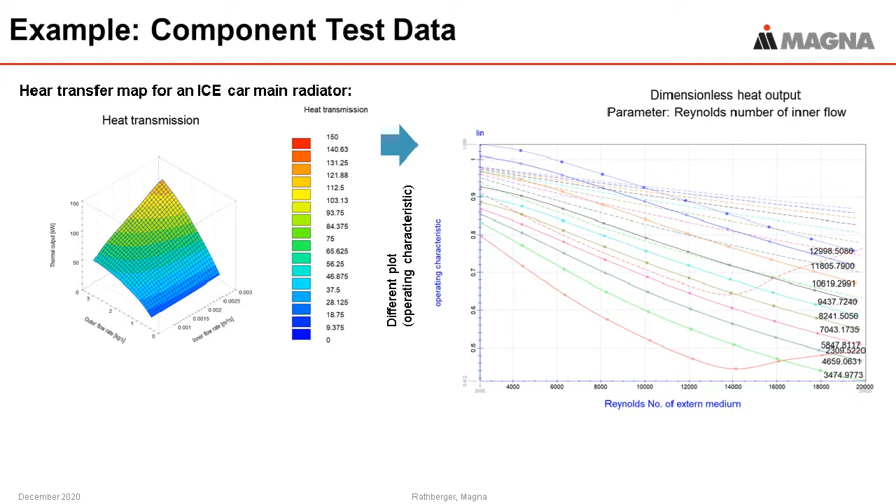But if you take a closer look at this map, and if you translate this test bench data into dimensionless numbers, so if you look at the Reynolds number and the Nusselt number, then what you see, and these are examples from our simulation tool KULI, is that some of the operating points do not look quite right. So these bold lines here, these are the measured curves.

And what you see is that when the external heat transfer exceeds a certain value, then these numbers start to rise again. These curves have a curvature here. For example, if you look at the red line, it climbs here. This might look a little bit strange. Actually, this is not a problem. It just shows that for sufficiently high air flows, the total heat transfer is dominated by the heat transfer on the air side. So this is actually quite okay.

But what is not okay is if we compare this to these dotted lines here on the top. These dotted lines are the theoretical maximum heat transfer that you can achieve, the theoretical maximum Nusselt number. And what you see is that there are some points which are unphysical. This means that they are not to be expected from the heat exchanger data that we have entered. They do not make sense, and they violate the laws of physics. So it's not that they are unlikely, it is frankly that they are impossible.

So what does this mean? Is this a problem? It surely is, because if you look at these lines here, these are the points where you have high coolant flow rates and very low airflow rates. And these are typically the points that are most critical for a vehicle. This would be, for example, an uphill trailer condition where the airflow is very low because there is hardly any ram air pressure from the air coming from the front of the vehicle.

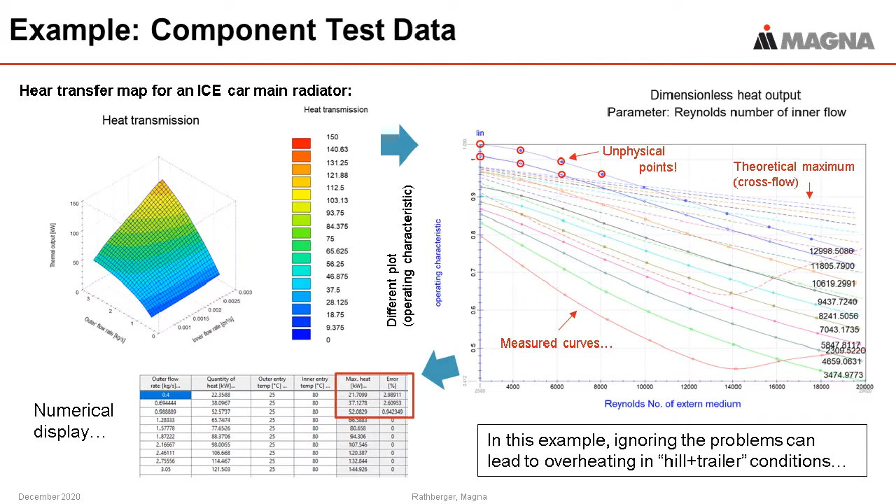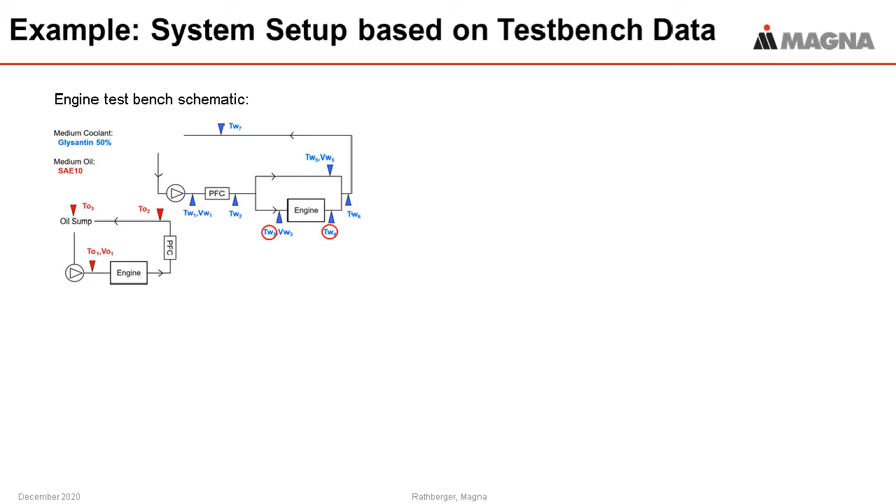And what we see is that the first couple of points, they look pretty realistic. There will be some heat rejection from the engine to the coolant. Accordingly, it will warm up. But then at operating point 7 or so, something strange happens. Suddenly, the temperature information drops to a little bit above 20 degrees Celsius. And even without any detailed analysis, something is very, very strange here.

This is of course a generic example, but we have seen very similar things in real life test scenarios. Probably a sensor has fallen out. I mean, it has probably just broken down, or probably it has been shaken loose from the vibration of the running engine on the test bench. Whatever. For one reason or the other, this sensor value drops to a little bit above ambient temperature.

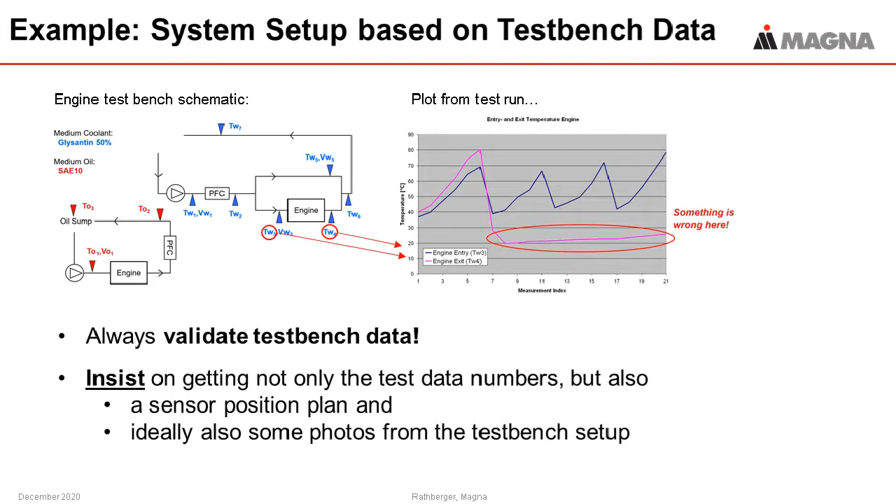So what kind of implications does this create? Well, obviously, if we enter this data in our simulation model straightforward, we will get garbage. Even if the first couple of points are correct, these baseline points for the higher operating conditions are just not usable. On the other hand, if we check this and see that these values are wrong, then we can probably use some of the other measurement positions and identify a realistic heat rejection for the engine by doing some math there.

We could, for example, compare the total input and output between the point right after the PFC, the heat exchanger, and after the engine branch. We can do some math. We can work with data anyway. But in order to do so, we need the test bench schematics, and we need to look at the results.

So to summarize this first point, what do we have to take care of? Well, the most important thing is never blindly trust your test data. And even if it's probably technically not your responsibility, you will be in a lot of trouble if some problems occur. Always validate. And as we have seen in the last example, it does not always have to be some complicated math. You don't need physics all the time. Sometimes a simple visual check, if this looks like you expect it to look, is sufficient to prevent a lot of additional effort and trouble.

Always use the support that is offered by a simulation tool. Many tools, including, of course, our simulation tool, KULI, will give you warnings if something unexpected occurs. Don't disregard them. Always try, and this is something that you will not always get, to get accuracy information for the data. Because false data is not always that obvious. Sometimes you really have to ensure that you understand, for example, the precision of the sensors used during the test. And accordingly, you should really try to get this information from your test bench engineers.

Try to get background information on the test bench setup for non-standard test scenarios. Yeah, you will need schematics. If you do not know where the measurement positions were, then you are severely restricted in evaluating their plausibility. And ideally, you could even try to get some pictures of the test bench setup.

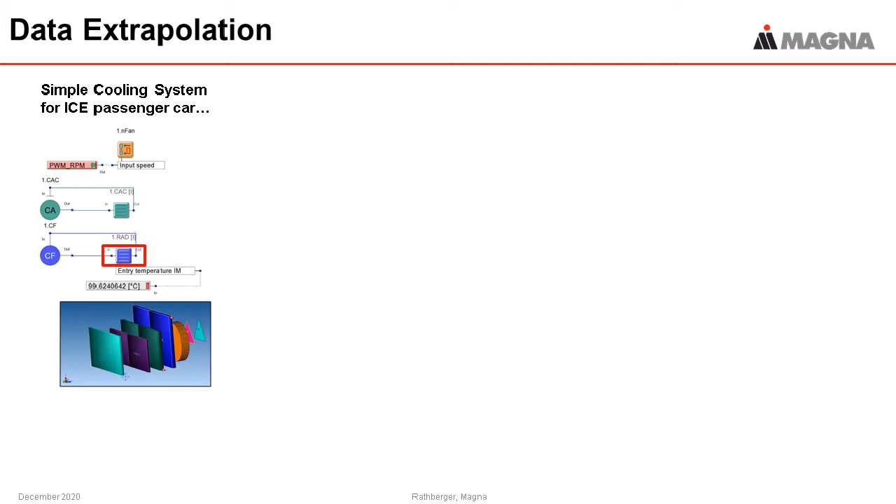So anyway, you shall not go too far. Well, what can that mean? Let me just give you an example again. If we look at this example here, we see a fairly simple cooling system for a combustion engine passenger car in this case. And specifically, we are looking at the heat exchanger setup, and specifically at the main radiator and the vehicle front end again. So what we see here in red is the data that we have received from the testbed. And we have based our heat exchanger on this data.

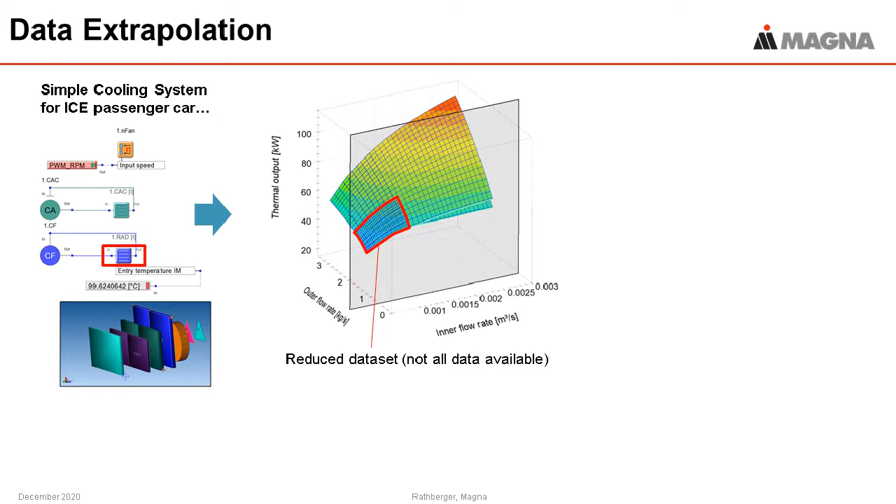If there are no physical properties available, it will just try to extrapolate based on the gradient, or maybe some other assumptions, but it will be an extrapolation. And in reality, having the identical set of data in this red area, having only data from there, does not allow us to predict which heat exchanger is the actual one.

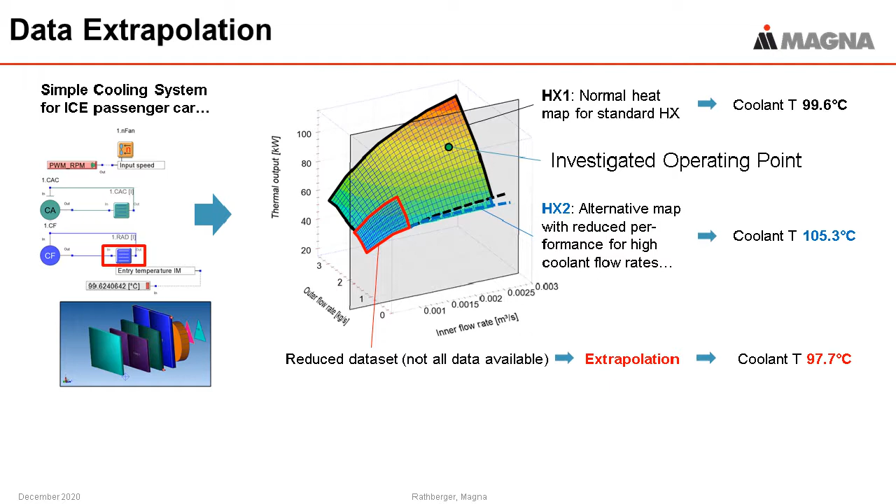But if we look at the blue heat exchanger, which has a significantly lower thermal output, this means that we need a higher coolant temperature level to remove the heat from our cooling system. And we will get coolant temperatures of 105 degrees Celsius plus. So probably this will be a problem.

And if we don't know which one is right, our tool will probably tell us you have around 98 degrees Celsius. And if instead we have over 105 degrees Celsius, this is not a rounding error anymore, but this is something that can lead to severe overheating problems in your final vehicle, so it should be avoided.

And how can it be avoided? Well, first of all, you have to be aware that there might be a problem. You have to know that there is extrapolation occurring. And in our post-processing tool in KULI, we will give you an extrapolation warning. Other tools will most likely do very much the same. But people tend to disregard this because they say, oh, well, the temperature results look good.

Let's just move forward. And it is tempting, obviously, because you never want to replace a simulation result that's good with something that's problematic. But sooner or later, the reality will leap up on you, because physics just cannot be cheated.

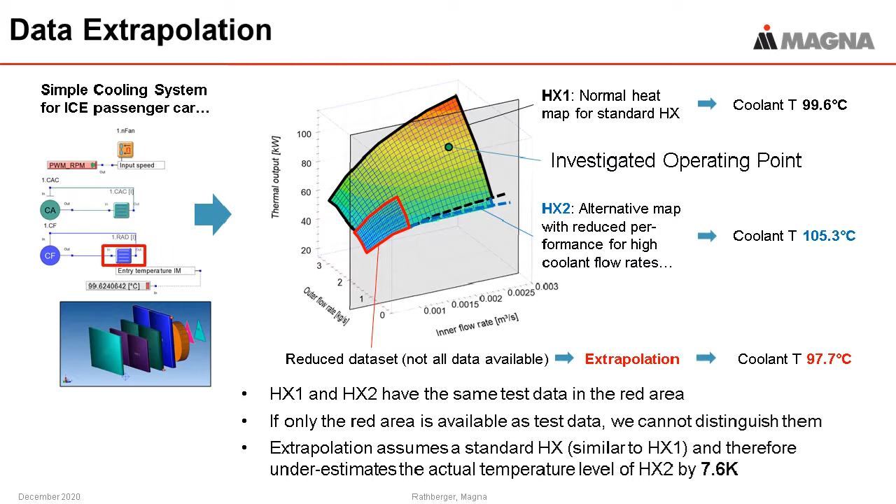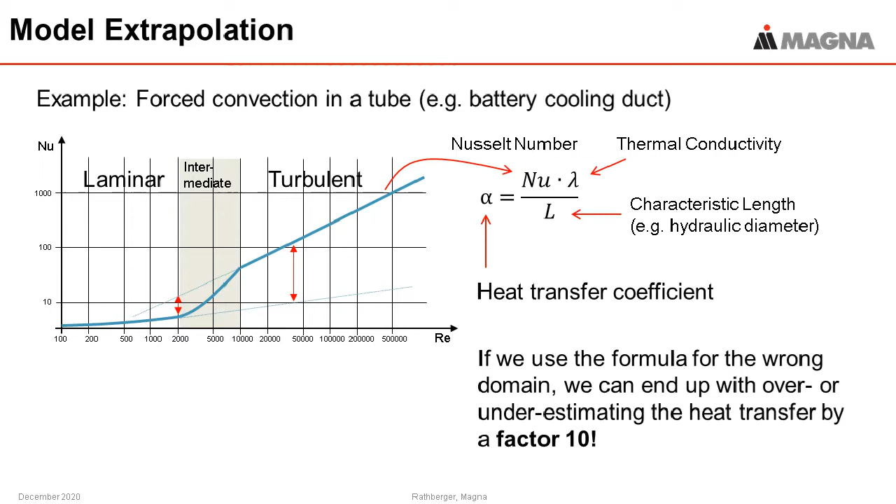So how to summarize? Always check if extrapolation occurs. It's that simple. Of course, your simulation tool will help you with this. KULI definitely does. Others do as well, I would expect. And avoid extrapolation if possible.

Of course, I'm not saying that extrapolation is a problem per se and always. There can be situations where you just do not have more information than what you have at hand. And in this case, you need to extrapolate. Maybe if extrapolation is just by a few % outside your tested area, it will be okay. It will be reasonable. Sometimes you will even have to go further out and just do an intelligent guess.

But then at least you have to be aware that with the assumptions that you make, also your simulation results will be nothing more but an intelligent guess. They are probably better than nothing, but they are certainly not the truth. So if you must extrapolate, be careful and always check the plausibility.

Deadly sin number 3, unnecessary complexity. I think the picture on the left-hand side once again shows it all. So once you get used to working with your simulation tool, once you become an expert, once you know how your tool works and you understand all the details, it will be very, very tempting to set up very elaborate models and just enjoy the level of detail that you have implemented and the pure beauty of it from an engineering point of view. But you shall also find beauty in simplicity, especially when complexity does not bring you benefit, as shows the next example.

So this is a cooling system for a battery electric vehicle. So nothing very much fancy here. We have basically two branches of our cooling system. One branch which is for battery cooling, which is mostly cooled by a chiller because the battery usually wants to have relatively cool coolant temperatures, maybe around 30 degrees Celsius, 25 degrees Celsius maybe.

On the other hand, we have a second loop on the top side, which is for the powertrain cooling. Motors and electronics, they can live with higher temperature levels. They probably also will not be cooled by the AC system, but by a radiator instead. We have two coolant loops with two different temperature levels, so we want to run them probably separately. But in winter conditions, it can also be useful to use some warm coolant from the powertrain to heat up your battery. This is something that is modeled in several vehicles nowadays. I think one of the first who did this was the Tesla S.

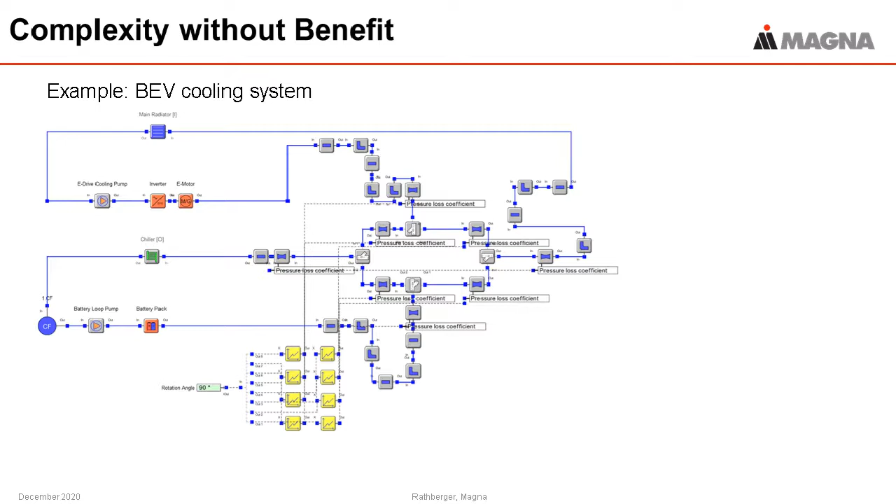And this beauty here on the right-hand side, this is what I just slightly ironically called my favorite rotary valve. So I'm obviously in love with this component because I've modeled it with a very high level of detail. I've modeled all the different diameters of the inlets, the bends the coolant makes in the ducts leading into the valve. The interior of the valve is modeled with a very high level of detail, and for sure this will give us a very faithful reproduction of the coolant mass flow distribution in our cooling system. And yeah, as I mentioned, this is the rest of the system, but nobody really cares about this when you have this beautiful, beautiful rotary valve, right?

Wrong. The problem, of course, is the mass flow distribution in the ducts will not be influenced by the rotary valve alone. The question how much coolant flows through one branch and through the other one is, of course, also heavily influenced by how much pressure loss occurs in the rest of the cooling system. So, as you can see, we have not modeled any ducts here in the rest of the cooling system. We just modeled some pressure drop of the components. Probably even that is not very accurate. We have pumps inside there, but it really lacks a lot of detail outside here.

And it might be that your task in a project is to focus on the rotary valve, but still, without the level of detail in the rest of the cooling system, you will not be able to make any reasonable predictions, even if you add more levels of detail to your rotary valve simulation model. So, accordingly, this detailed valve here brings no benefit. It's just additional effort to set up. It's just an additional potential source for errors. Each of these components has some test data or some geometry data inside. Doing things wrong here, for example, extrapolation, will just add additional problems.

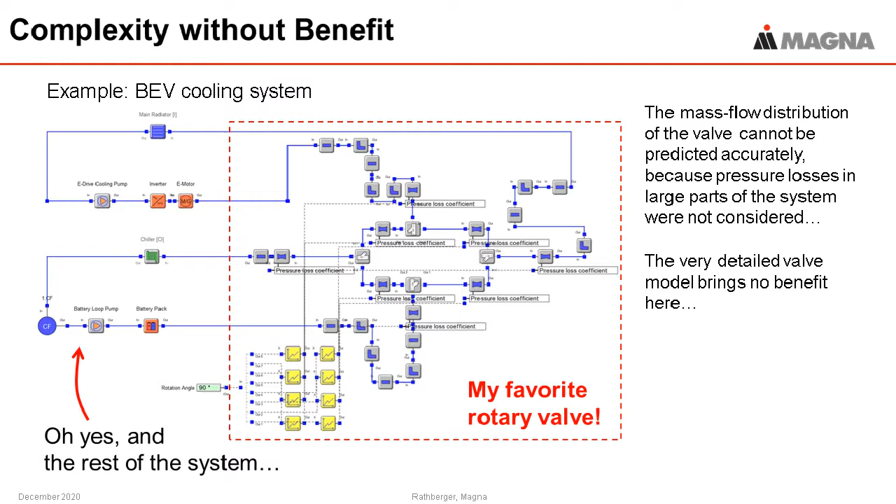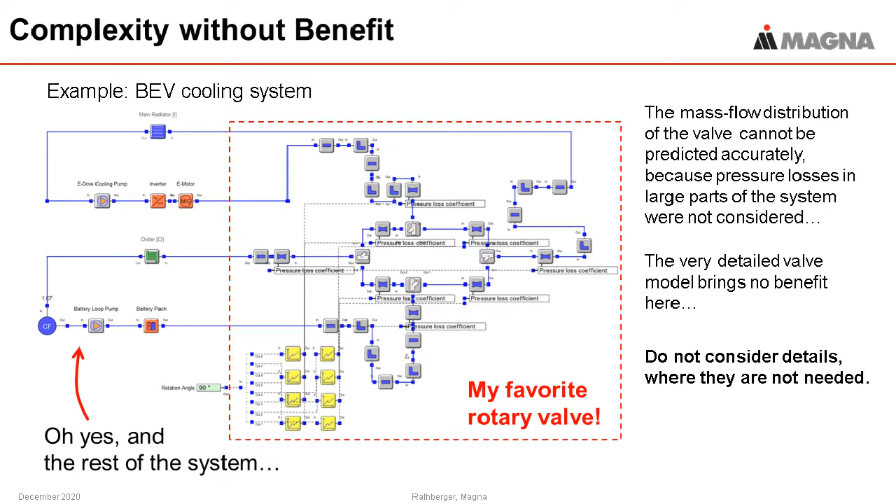I'm not saying that you shouldn't do detailed models, but you should always validate if they make sense for your specific application and if they match the level of detail of the rest of your system. And if they don't, don't do it. So, as a summary, let me say this. The accuracy of different parts of your model should always fit together. Different parts can have different levels of detail, but you have to think about how they interact and whether they have adverse effects on each other. If they don't, it's perfectly okay. If they do, you probably should think again. And then, of course, avoid unnecessary details.

Moving on to the next point, refusing help. This is something that I think even small children learn very early, that they can say, I can do it on my own, I can walk on my own, I can eat on my own, I can run my simulation model on my own. But sometimes it's not clever, because it's always better if you work together with some colleagues and let them double check your results. It's not about who is better, it's about getting the right results at the end of the day. So I didn't find much statistical data on engineering simulation.

What I did find, though, is some statistical data on software development. A study from the University of Cambridge says that software developers on average spend almost 50% of their time debugging. This means you set up a model and then you spend time looking for the mistakes that you made. In our case, when we do some simulation, this is probably not the case when we're doing just a routine task.

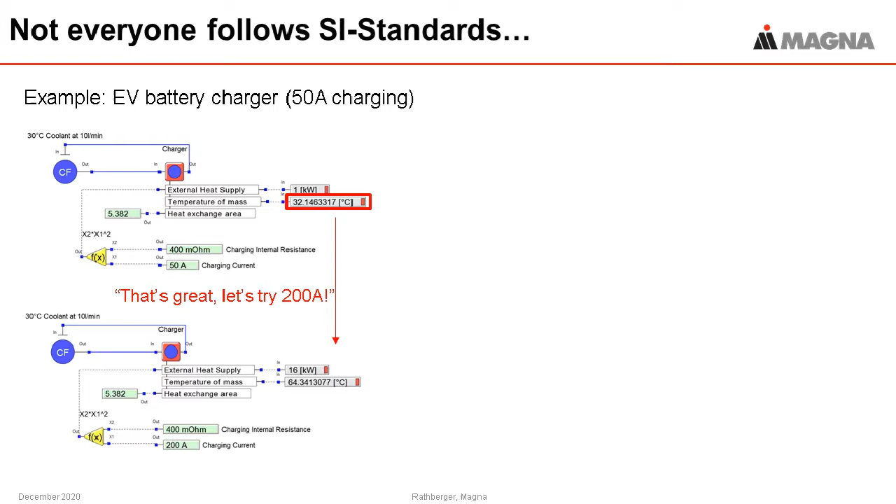If we now become more bold and increase the charging current to 200 amps, so something for fast charging, we still get 64.3 degrees Celsius, which is still quite okay. It's not a big deal here, right? Wrong. The problem is that what was entered here as 5.382 actually were square feet. And this means, as we did not specify the unit, the simulation tool was assuming that this is SI units. And it just assumed that this is an area of 5.382 square meters.

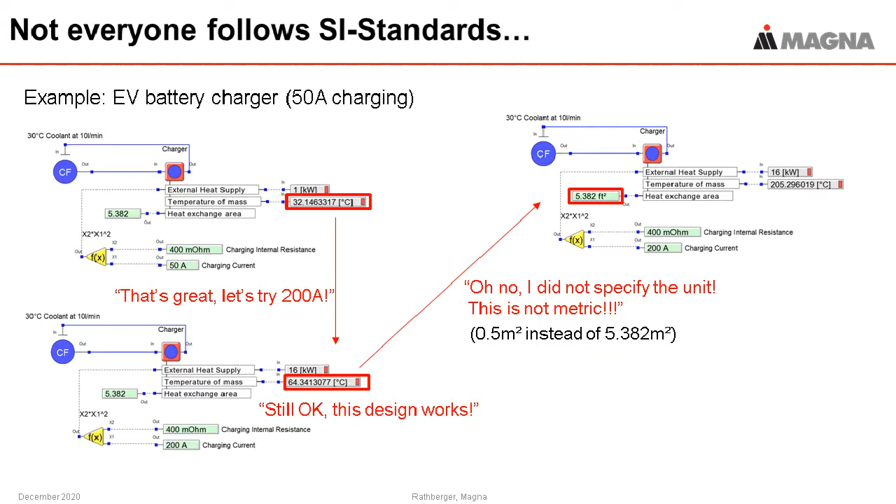So obviously we have a huge heat transfer area here. But in reality, if we add the square feet value here, then instead we end up with 0.5 square meters. And the result is that the temperature level is now at 200 degrees Celsius. And I would say that we are now approaching temperature levels where probably a Martian probe might burn up, but we definitely do not want to have these temperature levels in your cooling system. Okay.

Moving on to the summary. Always specify your units. It is important. Missing units might be misinterpreted, either by your simulation tool or by other engineers. Both are equally bad. Many simulation tools, including our software, support unit usage. It's really just a click and everything will be fine. Problems will become much more obvious when you use units, and especially if you work in teams which cooperate between US and Europe, for example. It's imperative to use the units. Everything else will lead to problems sooner or later.

And finally, the last point, wanting too much. So let's say, in a way, greed. And I've titled this: in the beginning, there was a heat exchanger. And what I mean by this is a very simple thing. Really a very simple recommendation. Do not start with the full complexity in your simulation model. Always increase the complexity step by step, and always test and validate your simulation model before you take the next step.

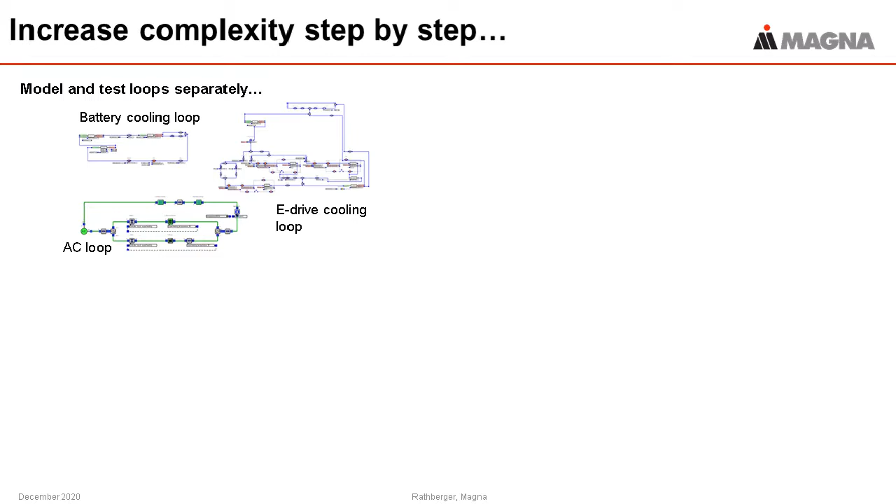I'm from Austria. In Austria, we have a lot of mountains, and when you're climbing in mountains, one of the basic things is always to secure that you have a safe step before you make the next one. And it's just the same in simulation engineering. So in this example, we have a system where we have a battery cooling loop, an e-drive cooling loop, and an air conditioning loop. And we can model each of them separately, and we can validate each of them separately. So this is what we definitely should do before we assemble them. And when we have assembled them, then the next question is, what about the controls?

Because the control system is something that is usually just as complex as the physical representation of your cooling system itself. A lot of things can go wrong there. So before you start fiddling with the controls, use some dummy controls that produce easily reproducible values and check whether your simulation model performs as it should.

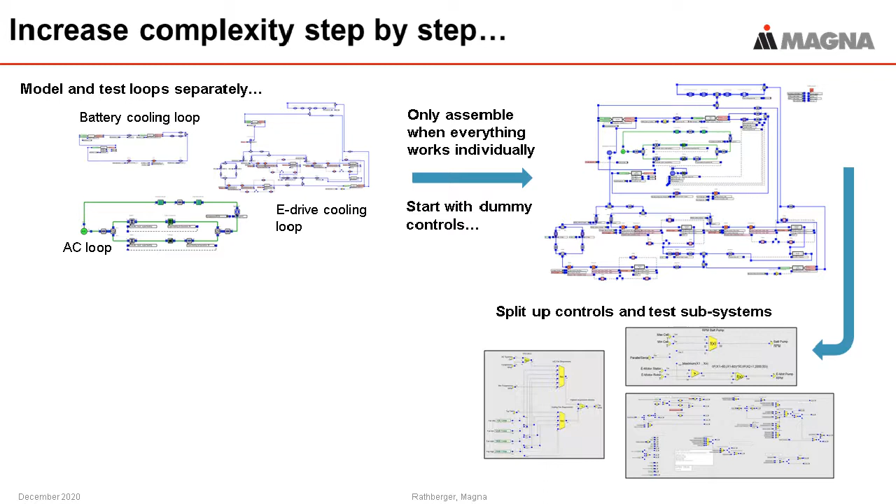And then, and only then, you should take the final step to first split up your controls and test the controls each by itself, and then assemble them to a complete vehicle model, including the complete controls. Again, this is something that seems to be very obvious, but especially in our support activities, we frequently see people committing just this sin, especially people who are not so used to simulation.

They sit at their computers, they create the mother of all simulation models in 14 days of intensive work, and then they click the simulation button, the go button for the first time, and nothing works. And as you can imagine, finding the needle in the haystack, or probably the needles, because for sure they have made more than one mistake, is just a lot of trouble.

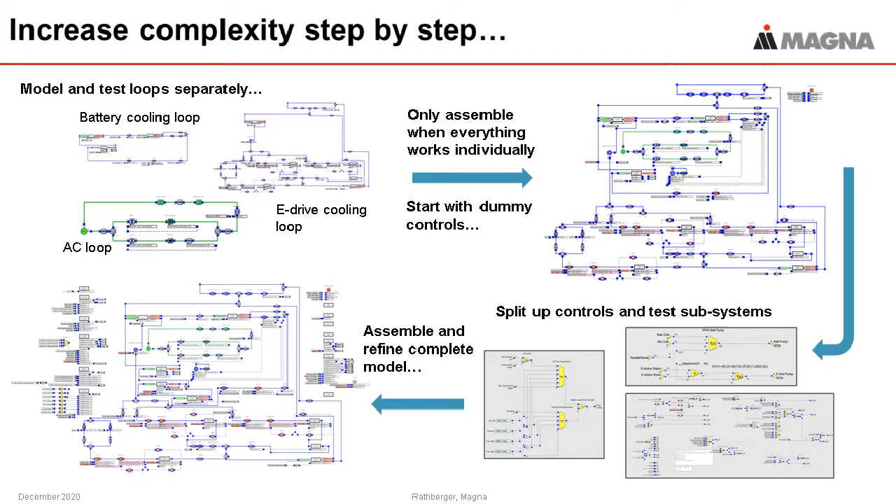And usually they try to fix this then for maybe another 3 or 4 days, and after that they're so frustrated that they either never simulate again, or they just throw away the model and start over. And this is something that can be avoided by taking individual steps. So, as said before, if you can use previously used and validated models, they are an excellent starting point. Do that. Increase this complexity step by step, and also, especially when you are a beginner, don't do this. Talk to your colleagues and listen to recommendations.

So we're now at the end, and let me just reiterate on these 7 deadly sins and summarize them once again before we get to the general discussion part. So, no data validation, very bad. Extrapolation without being aware that you're actually extrapolating, don't do that. Unnecessary complexity, it will cause a lot of trouble. Refusing help, not a good idea. Ignoring warnings can go well, can lead to disaster. Neglecting units most certainly will lead to disaster. And wanting too much is not a good idea as well.

So with that, I'm finished with my part, and I really would like to hear from you, maybe some questions, or maybe also if you can share some experiences from your side. We are very happy for that. So Rolf, I think you are checking the questions. Do we have open questions that you haven't been able to answer so far in the chat function?